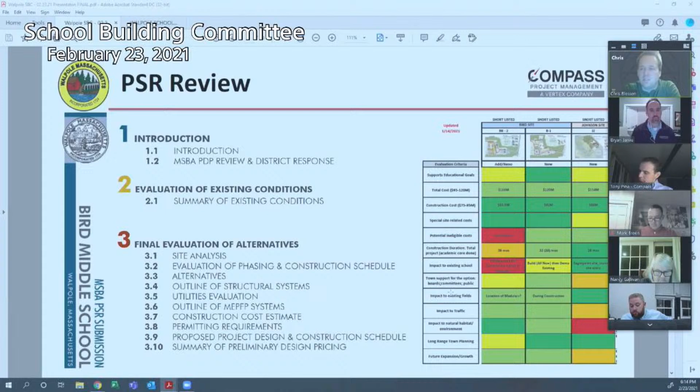The image on this page is from the ED program, updated yesterday. We go through and make diagrams that highlight how the building design works in relationship to the educational program. The top left image talks about the building's ability to be cordoned off into a public and academic building, with a door separation between the two, allowing events on the public side while the rest of the school is locked out at night—maybe a voting scenario where you want the school secure while having voting in the gym or open space.

The three academic neighborhoods are highlighted with the organizing principle of that central spine. The one on the right talks about the relationship of the gym to the first floor and how you access that off of the second floor lobby.

The one on the bottom is a diagram showing how the SPED program stacks, creating pillars that go through all three floors, helping organize and distribute SPED equally throughout the program and building. You find those in the educational summary, section 4.2, embedded with the educational program where we talk about design responses.

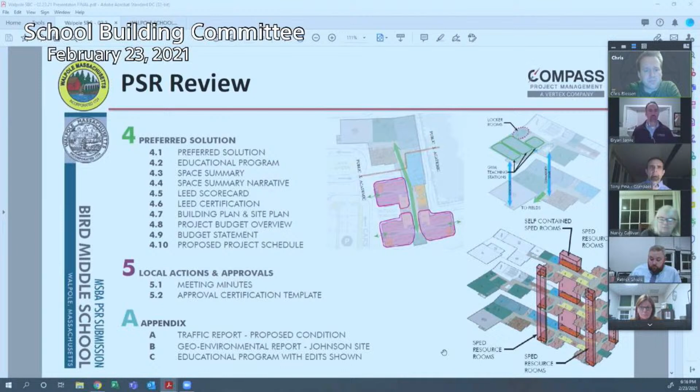So then we have the B1 option, and you should have seen these as well. These are the updates for the B1 option, left to right. You can read there: first, second, and third floor.

The classroom wings, on the southern side of the building, stack perfectly. Then you have the public side of the building, which is the auditorium and gym, and the media actually on the second floor, which could host meetings and different kinds of events. So you can see how it's laid out here—that's the current thinking of B1, how we've been pushing and pulling on the program to fit in the location this committee had voted on previously. We think we've made a lot of headway in that regard.

So these next three slides, I believe, are all the same floor plans, just a little more zoomed in, one floor per slide. You can see a little more detail on how we're thinking in terms of administration, and the auditorium and the band room relate to the auditorium next to it.

Again, you can see how some of the classroom wings lay out with the flexible breakout spaces in between the classrooms, and all of that kind of stuff. This is all the nuts and bolts of how the plan comes together. So we can go quickly through this.

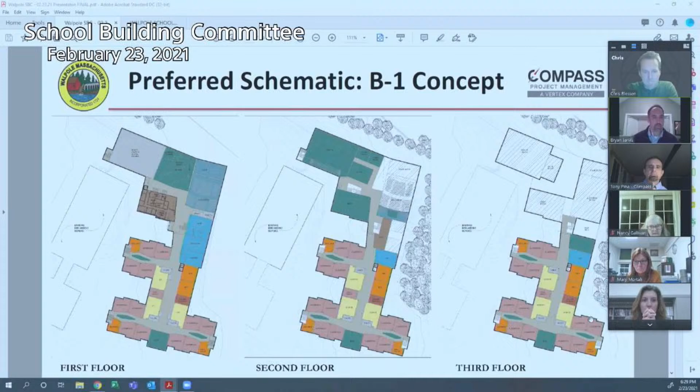Keep going. I just have one question about the proposal for the 600-seat auditorium. How does that compare to our existing sites like Walpole High or JMS? You could go back to the space summary to see that number. Chris, you want to explain? We don't have Walpole High figures, but if the question is how big Walpole High is...

I don't know if I know capacity, but I know square footage. The Johnson is 4,600 square feet, and the Bird is just over 2,800 square feet. We're planning for 6,000 square feet right now.

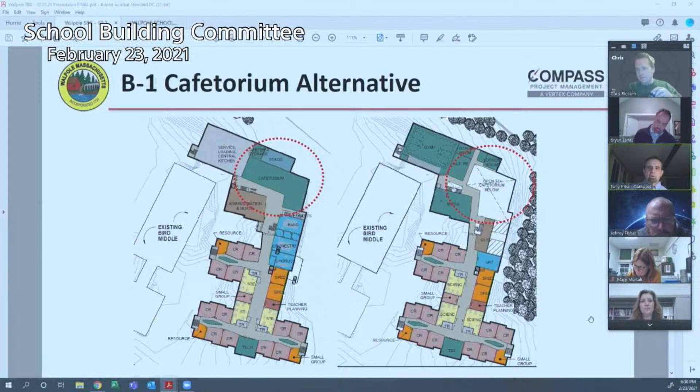Any other questions or comments related to the B1 concept? Yeah, I had a question. Tony, this is Boris. Question regarding Jeffrey Fisher's comments about the auditorium—since the school is being built to fit 900 students, is 600 seats sufficient for the auditorium?

600 will hold 2 full grades at one time. The thinking now, Boris, is that you'd have a grade performing, or you'd schedule 2 grades to attend a performance, or a grade putting on a performance with 2 people per household in the audience. That's the current thinking, but it can be revisited.

If I could add something—I have a figure in mind. A close friend of mine at school is a technical theater director, and in conversation with him I recall the old MSBA standard for theaters wanted to fit half your student body in the auditorium at once. I don't know if that rings a bell, but the old MSBA standard for a high school auditorium is half of the population, up to a maximum of about 720. But they only have a high school standard right now.

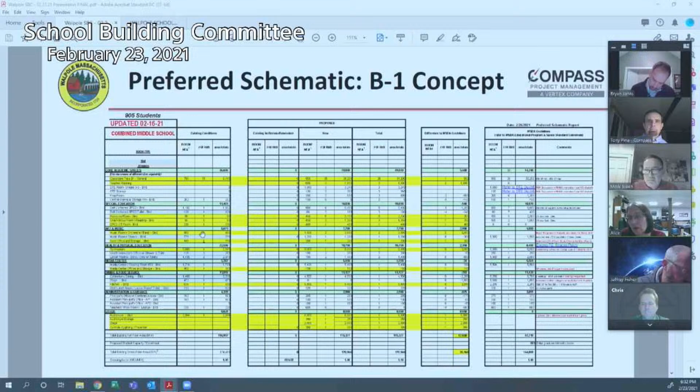In theory. I think Alice had a question. I have a question about the previous slide, about the elimination of the separate teachers' lounge and workroom—what does that mean?

In the space summary, with every new phase of the project, we go through with a fine-tooth comb to find things we might have overlooked. The space summary had a line item for a staff lunchroom where staff could eat lunch, and a separate line item for a program called Teachers Lounge and Workroom. Because of the educational program, we added dedicated teacher planning rooms for each grade—one on each floor. In review with the district, we decided eliminating the separate centralized lounge and going with 3 separate spaces makes sense, while still keeping the staff lunchroom intact so they can go there and have lunch. It also gives them 3 rooms for teacher planning, one per grade.

Okay, thank you. And if I might add, Alice—it's luxury living for a teacher compared to Bird or Johnson now, especially if you're a teacher who doesn't have your own classroom. From my point of view, you've got ample prep space. Okay, thank you.

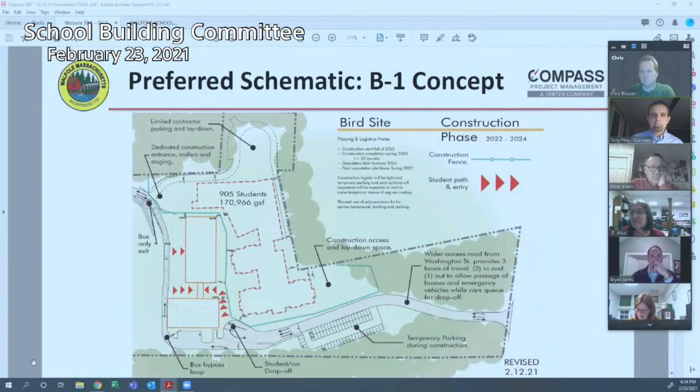I have a question. Questions or comments? Mr. Conroy. Yes. Since Bird is the site, the traffic study - how is that coming along?

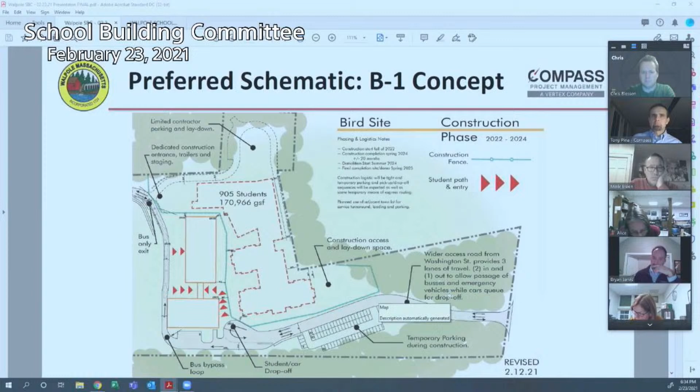Meaning, why don't we just hit it right where it belongs. You have a light at Washington and High Plain. In the morning, if it's anything like the high school, they'll be backed up all the way down the street - that's the only way to take a left. Coming out in the afternoon with parent pickup, I'd say probably better than 70% of your traffic is going to want to take a right onto Washington coming out of the school.

That needs to be looked at for queuing and everything else, because that's a very short space from the driveway to the intersection. And even in the morning, it's during drive time. In the afternoon it's not as bad because it's not everybody getting out of work, but you've got to look at both - one's at prime time in the morning trying to take a left, and the other is coming out of the school in the afternoon taking a right. I don't know if you guys have gotten to that point yet, but that's going to be a big consideration.

Chris, do you want to cover the highlights of the traffic report we received just recently? We received it this morning, so we haven't had a chance to really vet it. But the traffic report does say there are going to be some intersections that will have a worse condition than they have now, and they say it will typically be in the morning, not the afternoon.

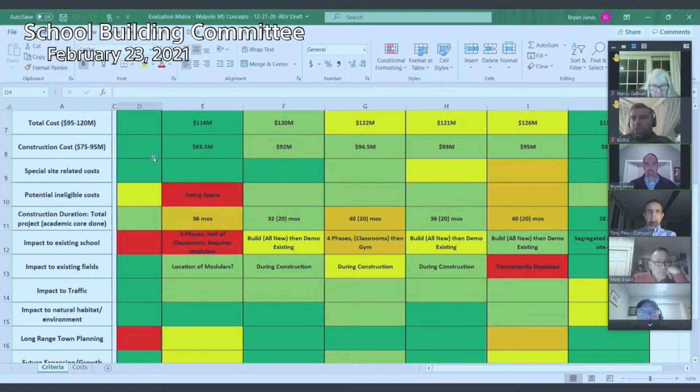So based on all of that criteria, the committee had narrowed it down from these 6 to BR2, because that had to be carried for the MSBA, B1, which did not impact the fields but did have disruption to the students during construction, and then also the Johnson site. It did not carry forward B4, B5, or B6.

So Brian, go back to that sheet again, would you please? Oh, yep, hold on. You see that? So what we're really doing is we're talking B6 is the one with the fields built down below, right there. And then B1 is the one we're considering here.

So it's a $7 million swing. That's not chump change. The B6 is the more expensive of the two, according to the preliminary estimates, carrying a placeholder to recreate just partial fields, so recreating one of the fields and a soccer field, not all of the fields that are being displaced.

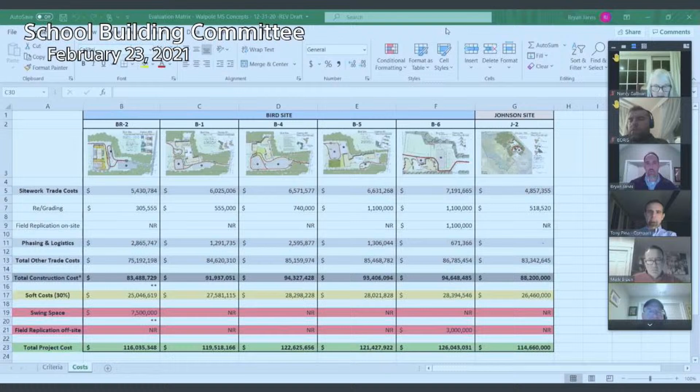Okay, right. So in that option, Jack, just to clarify, there is a soccer field built at the old location of the Bird site, up above, that also included that cost. It's about $6.5 million swing between B1 and B6. I think Jack was mentioning if you take the fields out of it, he wanted to know that cost. So if you take the fields out, that drops $3 million.

I think we also carried cost for replicating the soccer field on site, so that's probably another $1 million or 1.5. I think the B6 option on the field still ends up being more money, by a couple mil.

Right, my comment—I do this for a living. I don't see how the site work on the field is more than digging into a hill and putting in all these retaining walls. Very simple. How is that way more? The fields are flat. We're talking about frost walls. There's very little digging. But at the other end, we got to do a lot of digging and a lot of other stuff and extra parking lots. So that caught my eye, a $2 million difference almost in site work.

If Brian, I know you guys did it, if someone could send it to me at work, I'd love to take a look at how they come up with that. I don't want to waste everybody's time here, but I'd like to know how they come up with the difference between B1 and B6, that much money on site work.

From an administrative point of view, he was at a meeting every single week during the school day, and at meetings very regularly at night. So from an administrator's point of view, he told us you've got to be prepared to have your administrators ready to give a lot of extra time to the project. But in terms of the disruption, he had very positive things to say about how the project was managed—changing the routes for where parents would drop off and where the buses were, since it changes as you progress through the project. The feedback from staff, especially from the principal, was very positive as the construction was going on.

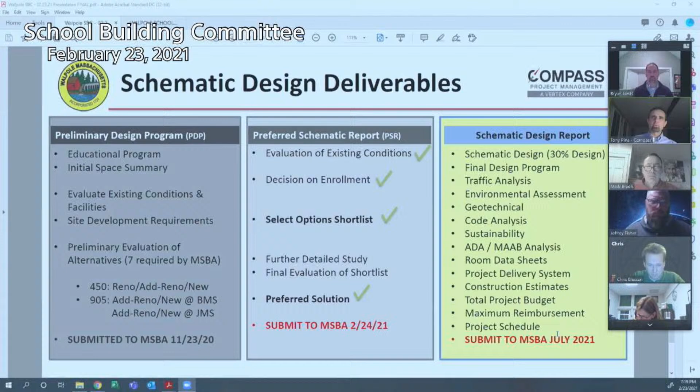We outlined some of the things we would be working on in March, which would entail talking about tightening up square footages and getting the balance of the minutes in, so we could get right to work if the committee sees fit.

That's pretty much it for the presentation. We do have some admin items, like when the next meeting is and coordinating with the select board. But at this point we should probably go back and entertain either more discussion from the committee or feelings about getting this thing submitted.

So the goal for tonight would be, if we move forward with the PSR B1 option, that gets submitted to the MSBA, we would go in front of their facilities assessment subcommittee in March. They have two possible dates, March 10th and March 24th. They would also return comments related to the PSR submission that we respond to in schematic design.

The goal is pushing that all forward to get to a point where we have an updated cost estimate — two cost estimates reconciled early summer — so we can get the schematic design put together and then enter the project funding agreement stage with the MSBA ahead of town meeting, and get out with enough public presence after the return of summer in late August, September, and October ahead of town meeting to get all the information out publicly.

So, to clarify, Mr. Jarvis, we're not locking into a square footage here with preferred schematic, correct? We're in a position where we can sharpen our pencils a little bit more, to use that phrase. Yeah, I mean, it's easier to go smaller.

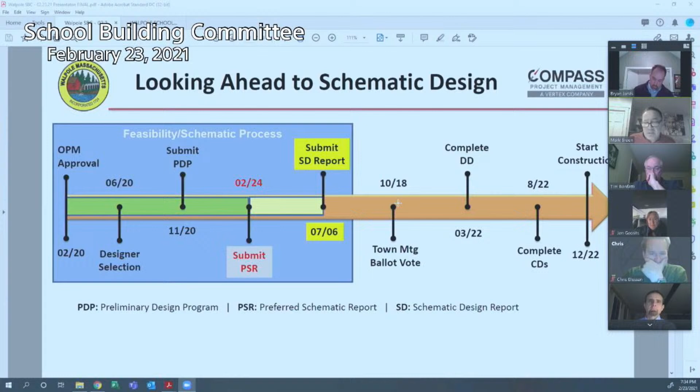Thank you, Ms. Goosits. So, not to push us along too quickly, but given that we now know we have latitude to tweak this over the next couple of weeks, unless anybody wants to discuss further, do we have a motion to submit the preferred schematic report to the MSBA? So moved. Second. We have a motion by Ms.

Goosits, a second by, I'm not sure who made that second. Ms. Lawson. Ms. Lawson, a motion by Ms. Goosits, a second by Ms. Lawson. So I'm going to poll the committee.

Mr. Friscia? Yes. Mr. Salvatore, I don't believe is with us anymore. Yes, I am actually. Oh, he is. Thank you, Mr. Salvatore. Your vote? Yes. Very good, thank you. Ms. Lawson? Yes. Ms. Gallivan?

Yes, and I would just like to say this is so exciting to think about for the kids, and thank you for the questions, are good ones. Just wanted to say that. Thank you. Thank you. Ms. Goosits?

Yes. Dr. Goff? Yes. Mr. Anderson? Mr. Anderson? Very good, thank you. Yeah. Mr. Conroy? I understand.

Thank you. Mr. Jeffrey Fisher? Mark, I raised my hand before the motion was made. Oh, I'm sorry, I can't see anything on the screen.

Would you like to make a comment, Mr. Fisher? Yeah, so I mean, I'm in favor of pushing the PSR forward, except with respect to slide 63, impact to traffic for the B1 site. I did want to ask Mr. Bonfatti what the preliminary traffic report stated, and I do not believe that submitting the impact to traffic as good for the B1 site versus Johnson as fair is accurate.

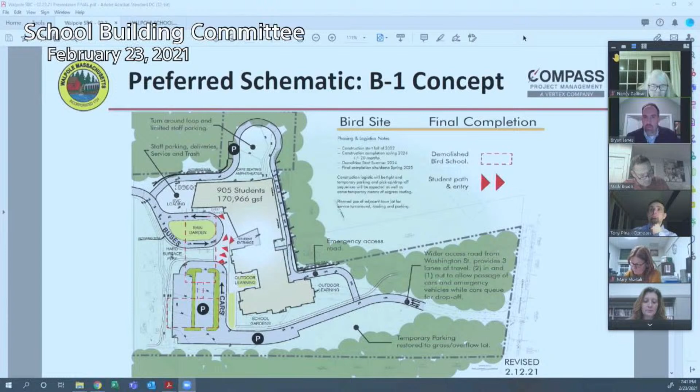Is it a question of whether the traffic would have changed the vote to go Johnson or Bird? To me, the traffic study right now is just generally related to the Bird site, and it's preliminary, to be more detailed as we move through schematic. So we could change it on the evaluation and say B1's traffic could be a yellow, but does that change the vote versus Reno, B1, or Johnson? I don't know if we're going backwards for that.

I don't agree whether we should hold up the PSR, but I do think we should level set on what the impact of traffic is for the B1 site, whether the current good criteria rating is sufficient based on the arguments made. I've understood there's been additional discussion with public safety over concerns about the pick-up for the B1 site, and honestly, I think the rating is fair to even poor, and to submit this comparison chart showing what it is now.

Yeah, so I understand what you're saying, Jeff. When we did the evaluation matrix, we had it as a good, not a best, so we had it at light green. The thinking was that knowing whatever site we picked, we'd introduce half the town's population to a site that currently doesn't go there. Any of the bird sites picked would have the advantage over a Johnson site of being able to create a secondary means of access, like a dedicated bus loop, which would hopefully help with some of that traffic.

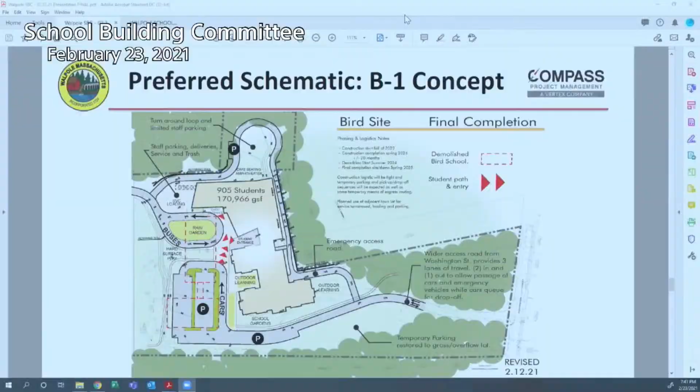So again, next we have item 6, to review the timeline and next steps. Mr. Jarvis, and I believe, Jeff, as well, you wanted us to reconsider the 6 o'clock time, if I'm correct. So perhaps we need to speak to that, the 6 o'clock time and or day of the week. Thank you. And I think last we discussed possibly moving to Wednesdays. Right.

Yeah, so next, Tony, we're just trying to schedule the next meeting of this committee, and the goal would be to come back with finalizing, go through the final square footage modifications and an update regarding moving into SD. Any comments back from the MSBA regarding PSR? We might not have any at that point. And then a clear understanding of ineligible items.

Yeah, day and time is obviously up to the committee. I'm just trying to avoid the dates that you see here, which is March 9th, 23rd, April 6th. These are select board dates, so that David, Patrick, and Jim can be joining us without having to be in 2 meetings at once. So if the committee so chooses to go on a Wednesday, then that conflict goes away. If we decide to keep it on Tuesday, I'm just trying to avoid those Tuesdays. And then again, time is up to the discretion of the committee.

I believe there was a feel for moving it. Trying to monitor 2 meetings at once where important things are going on, it's hard, and I can't do this. So if we can avoid Tuesdays where there's a board meeting, that would be appreciated. And I'm sure Mr. Johnson would appreciate being able to come to both meetings, especially at these stages as this gets moving on. Thank you, Mr. Salvatore. And I apologize, I think I had the mic open with the other meeting going on and may have interrupted you guys. I don't think I heard you, Mr. Salvatore, but thank you.